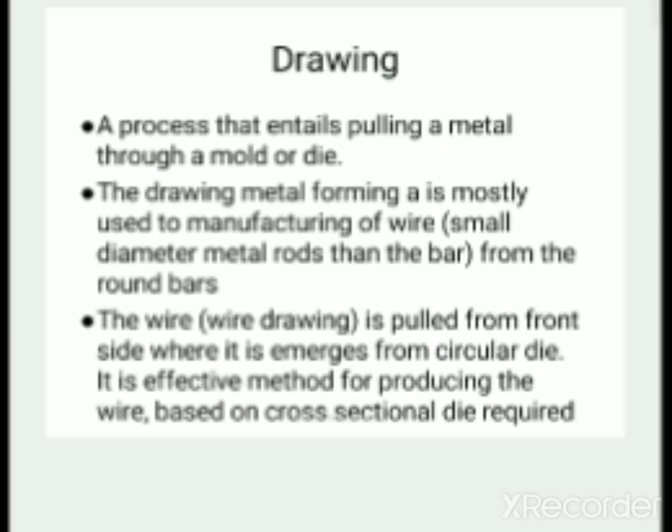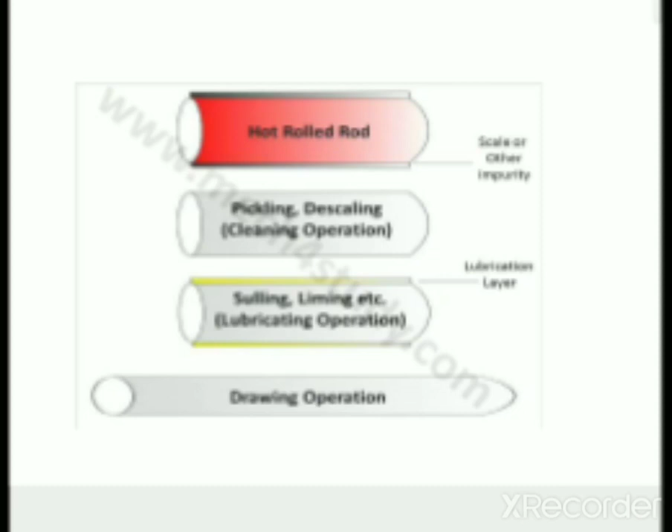Pickling is just a chemical operation for descaling, removing the scale that gets formed due to hot condition. Then sulling, liming, and lubricating operations, and after that we perform the drawing operations.

We are going to perform the drawing operations. This is the figure which I have shown. Now the same thing is written in the form of language.

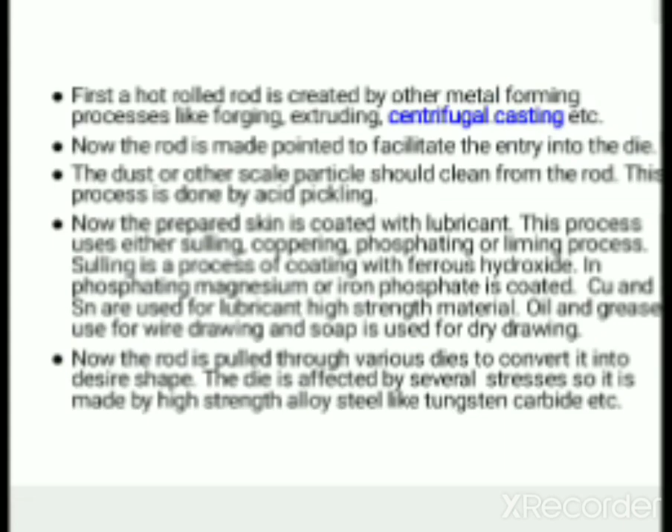First, a hot rolled rod is created by other metal forming processes like forging, extruding, centrifugal casting, etc. Now the rod is made pointed to facilitate the entry into the die.

The dust and other scaled particles should be cleaned from the rod. This process is done by acid pickling. Acid pickling means we dip the material into the acid so that whatever rust is on the billet gets cleaned due to that acidic reaction.

Now the prepared skin is coated with lubricant. This process uses either sulling, coppering, phosphating or liming process. Sulling is a process of coating ferrous hydroxide, and in phosphating, magnesium and iron phosphate is coated.

Copper and tin are used for lubricant at high strength material. Oil and grease are used for wire drawing, and soap is used for dry drawing.

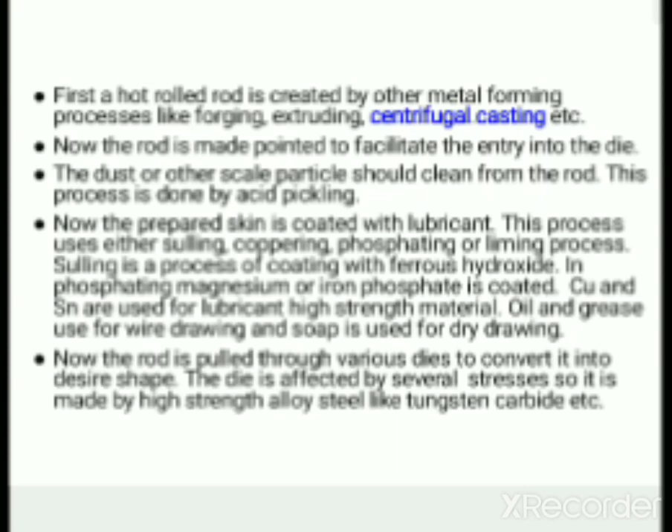Now the rod is pulled through various dies to convert it into the desired shape. The die is affected by several stresses, so it is made of high strength alloy steel like tungsten carbide, etc. The dies are made up of tungsten and carbide.

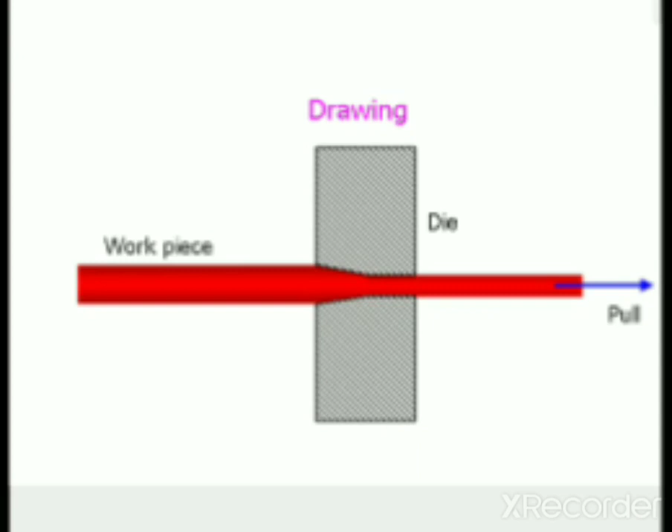This is the typical figure for drawing. This is the die, this is the workpiece, and we are going to pull it from the front side. Okay, so there are three types.

The drawing process is generally used for producing, and most of the time it is used for wire drawing, tube drawing and rod drawing of metals. So we will see first the wire drawing.

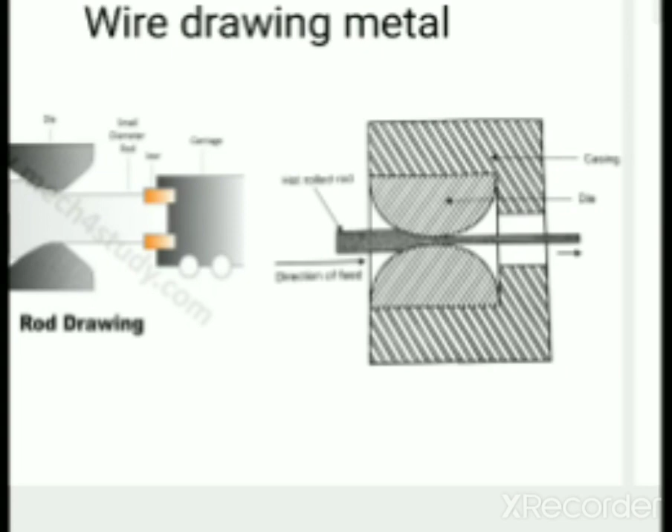The same thing is shown in block diagram or tree diagram form, for wire drawing. This wire drawing setup shown in the figure produces different diameters of wire, accomplished by pulling wire through a die, which is made from carbide or tungsten.

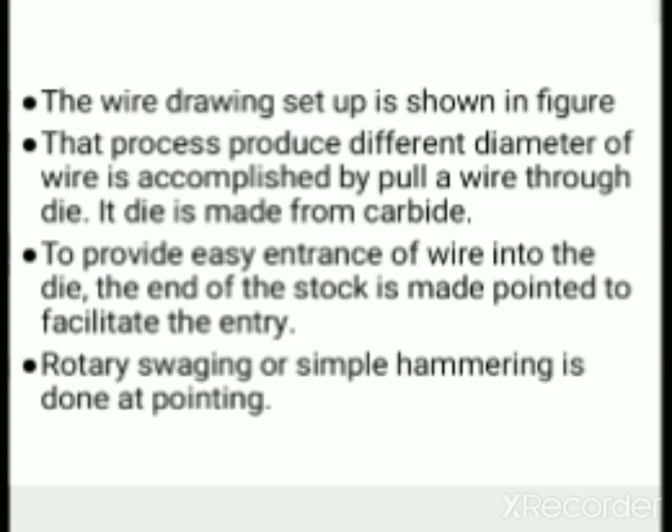So automatically, and after that we are going to pull that with the help of a gripper.

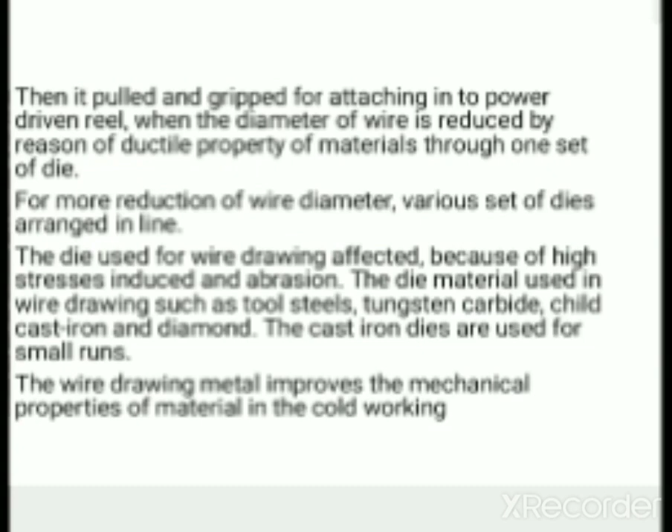This is the wire drawing process. For more reduction, we have to pass the metal through a series of dies - 1, 2, 3, as required. If more reduction is needed, we pass through 5 or 6 dies depending on how small a diameter or how much reduction is required. Based on that, you install the number of dies.

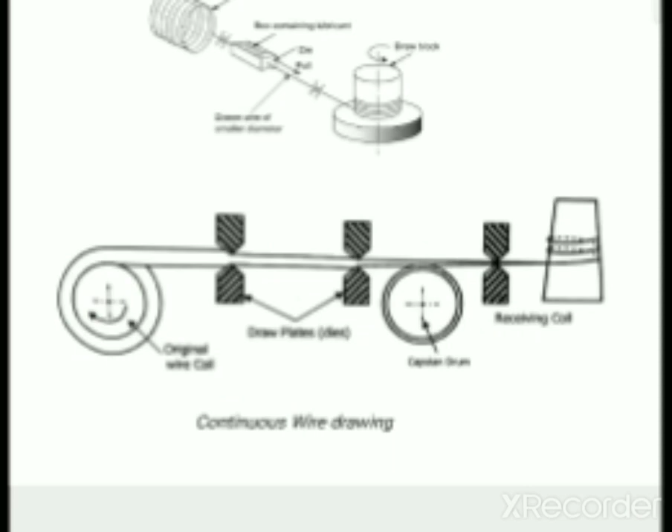Tube drawing: tubes are basically of two types - seamless and those joined along the length. Seamless tubes are made from rolling or extrusion. For tube drawing method, there are sinking, rod drawing, floating plug drawing, and fixed plug drawing - these are the four methods used to produce tube drawing.

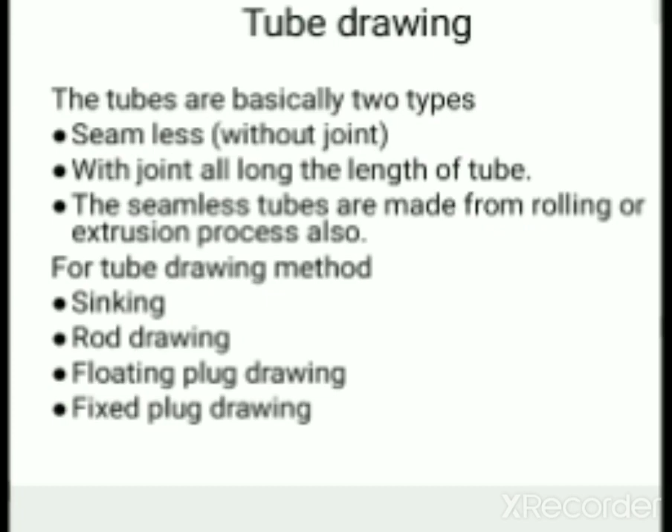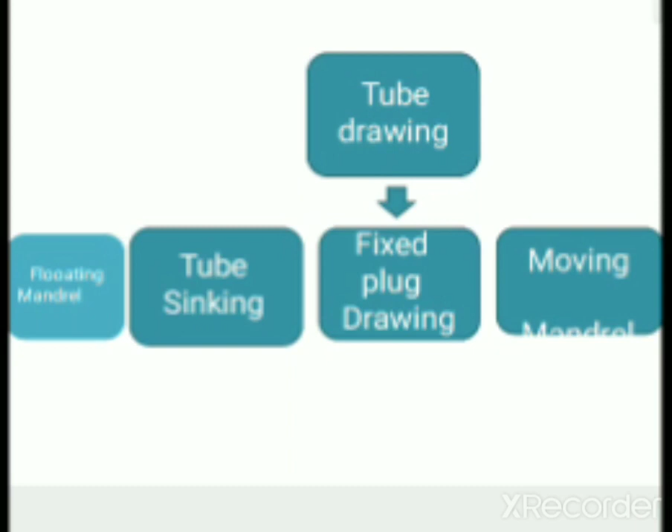As per the tree diagram, these are the figures for tube sinking, fixed plug, floating plug, and rod drawing.

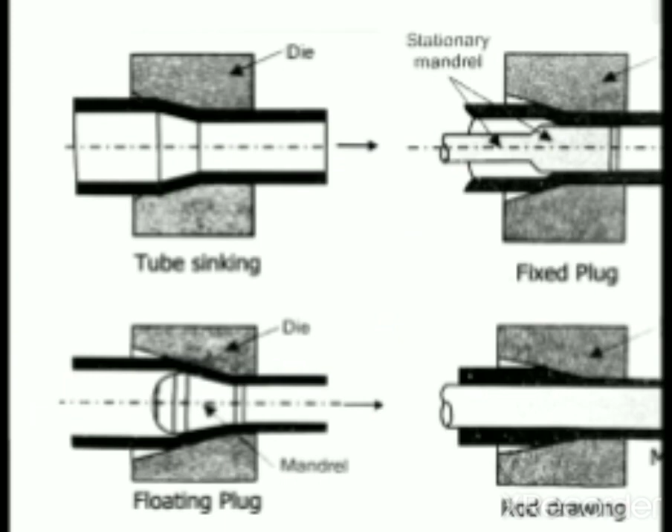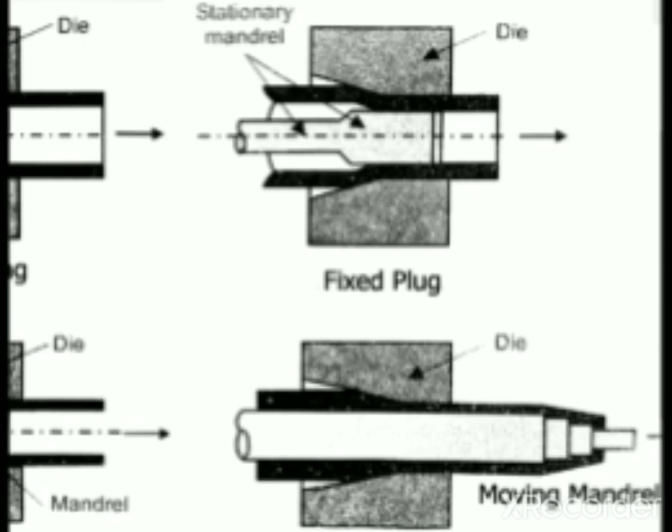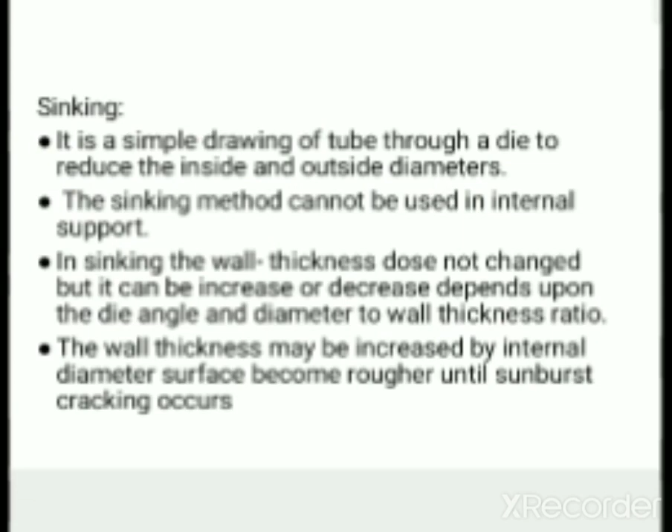Fixed plug drawing: the fixed plug or stationary plug drawing is the oldest method for plug drawing of stainless steel. Smooth internal diameter surfaces can be provided in short lengths with straight lengths, for slow operations with limited reductions.

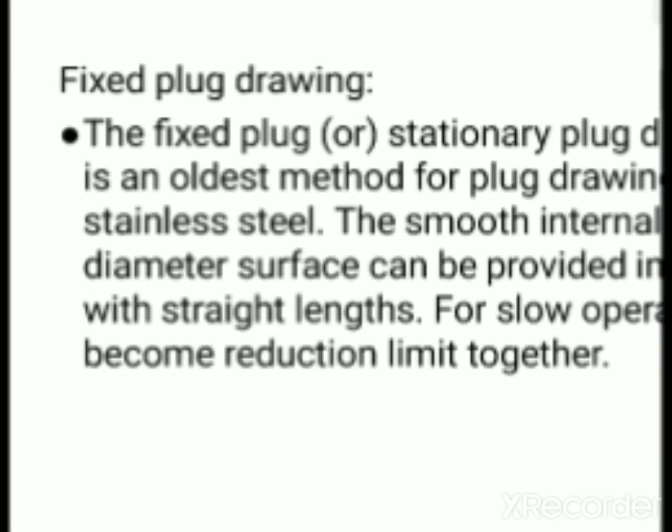This is floating plug drawing, and the last one is the moving mandrel.

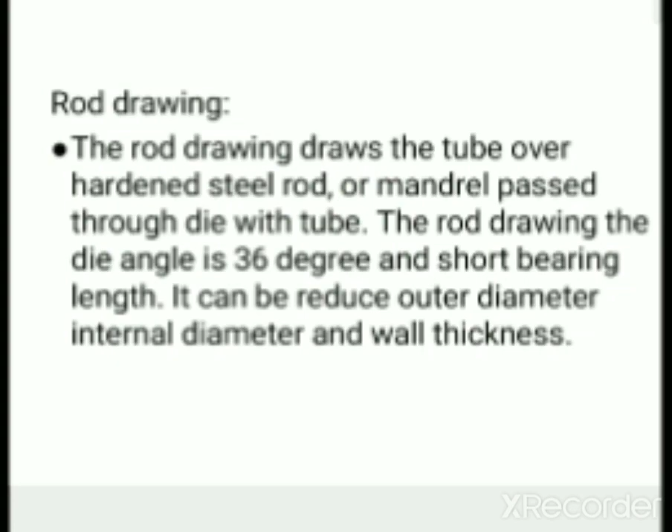Rod drawing draws the tube over a hardened steel rod, and the mandrel is passed through the die with the tube. In rod drawing, the die angle is 36 degrees with short bearing length. With the short bearing length, it can further reduce the diameter, internal diameter, and wall thickness.

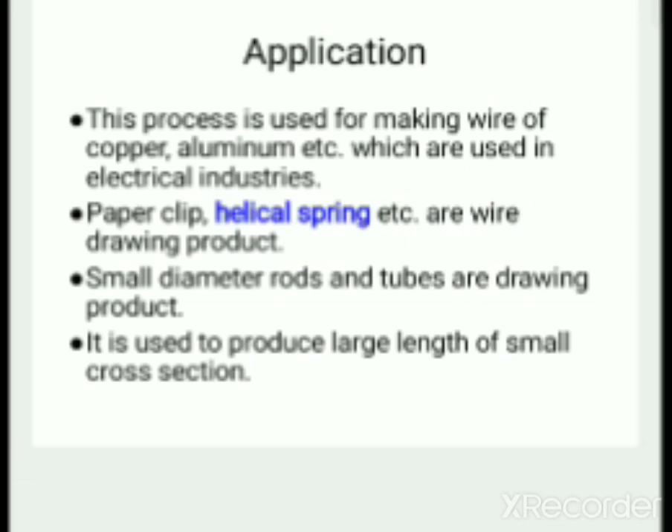Applications for drawing: this process is generally used for wire drawing operations, used for making wire of copper, aluminum, etc., which are used in electrical industries. Paper clips, helical springs, etc., are wire drawing products. Small diameter rods and tubes are drawing products. It is used to produce large lengths of small cross sections.

This is again a hot drawing process. It is generally similar to the deep drawing process used in sheet metal. So it is similar to that.

With the help of a punch, this process is used for producing pots, utensils, kitchen utensils. If we press this punch, the drawn product is formed, and that drawn product is again passed through a heated cup which is heated and operated again.

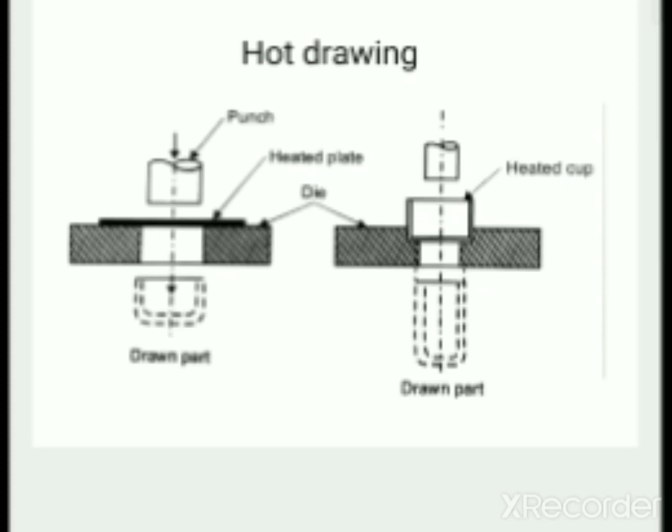It is going to produce a drawing, but this deep drawing or hot drawing happens in hot conditions. This generally comes in sheet metal, not pure deformation, but sometimes if thickness is more, at that time you have to go for this drawing operation.

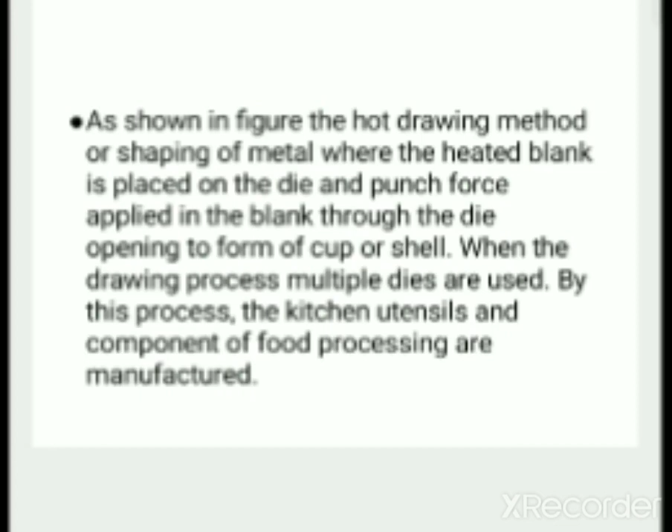As shown in the figure, in the drawing method or shaping of metal, the heated blank is placed on the die, and punch force is applied through the die opening in the form of a cup or shell. In the drawing process, multiple dies are used. By this process, kitchen utensils and food processing components are manufactured.

General defects observed in this process are wrinkles at flange, wrinkles at wall, tearing, earing, and surface scratches. These defects are generally seen in the hot drawing process.